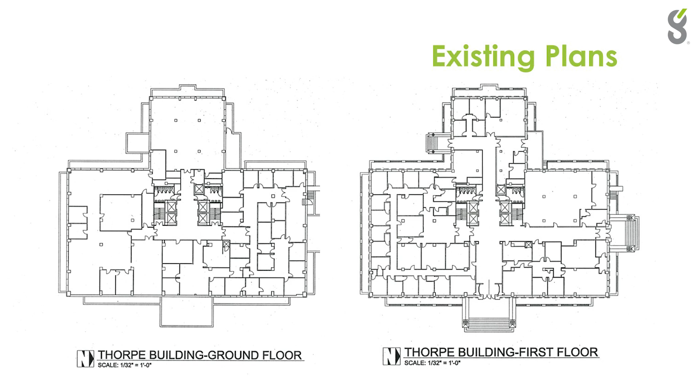We're going to round robin this presentation a little bit, and then we'll get into a little bit of a panel discussion. But thank you very much, Matt. And I just want to go through what we embarked on for this laser scanning component of the project. So this should be fairly familiar to most of us as a starting point for a lot of our renovations. It's basically blank plans, and sometimes it's gathered from the fire routes on the walls, and sometimes we have better drawings, like from what Matt had said.

On this particular project, we didn't have much to go on, and it was very clear in making a walkthrough that we had a lot of work to do because not all of these spaces were fully accurate and well accounted for. We went through a large planning process on this. We ended up doing a hybrid method where we combined a whole bunch of different types of scanning and a whole bunch of different types of reality capture all together in one. And it started with the exterior here.

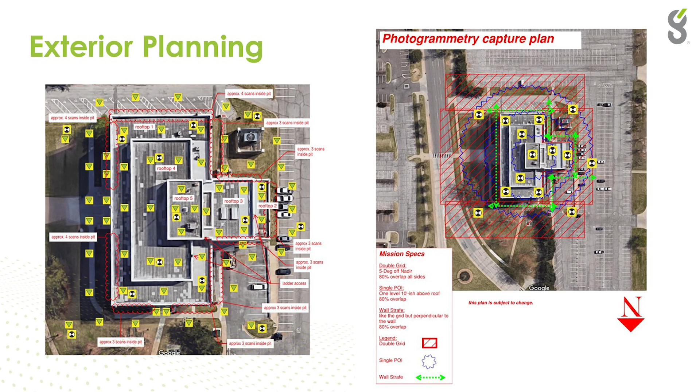And if you take a look at this on the left-hand side photo, we actually have located where we are going to place all of our instrumentation. That was a really big component of trying to make sure that we captured everything that was important to the project. And at this point in time, everything's important to the project because our task is to capture that 90%. And so we tried to go over and above what we could actually capture with just a regular tape measure. We went everywhere. So as you can see, we've got a very full coverage of the exterior using a terrestrial, and then we've also done some photogrammetry on the site.

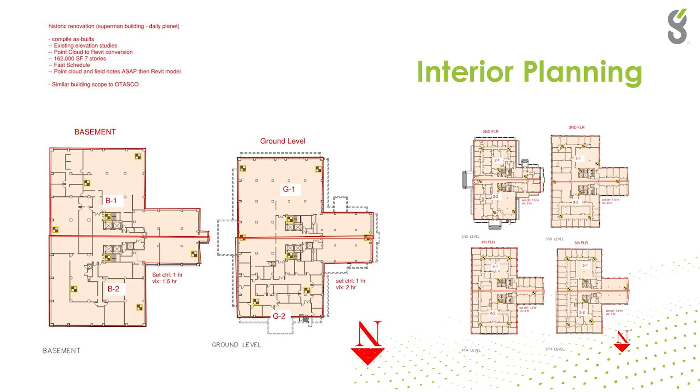On the interior, the schedule was really super important to make sure that we weren't going to disturb people, make sure that the secure spaces could stay secure, and we could really get done with each one of these floors and departments as quickly as possible. So we ended up using mobile mapping for this, and every project, every floor that we did had a mobile mapping scan plan associated with it.

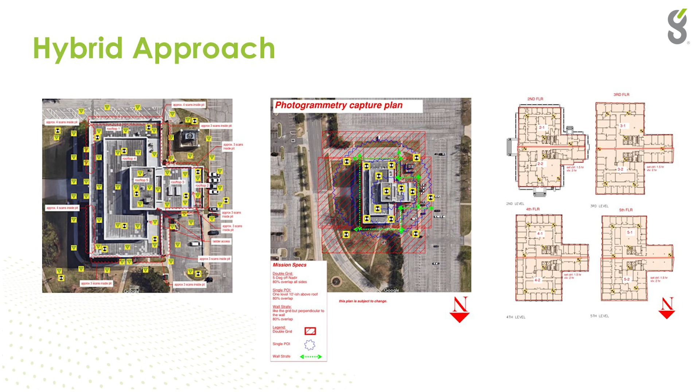So again, like I said, it's a hybrid approach where we took out our terrestrial laser scanner, very high density and high precision equipment, and then layered onto that all of the photogrammetry and mobile mapping.

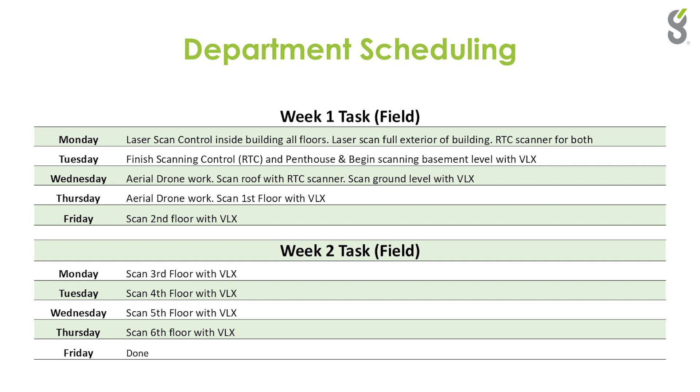Independent of that, we also had to work with, again, this really strict schedule. So we could only be in the building at certain times, and then we had to very specifically map out which departments we were going to measure when. So we always had to have somebody with us while we were doing it. We actually had to shut down a couple of elevators because we were doing elevator pits as well. So we covered the entire building.

The main piece of this is the skeleton. Just like any good skeleton, it's going to hold together the bones. It's going to hold together everything associated with the project. And in this case, our skeleton is actually control points. So we set control points across the building, through the stairs, outside, on the rooftop, so that we could validate and control our laser scans. And I can get into more detail of that if time allows.

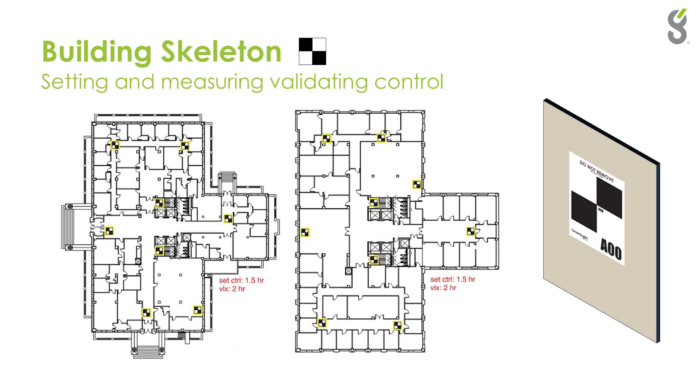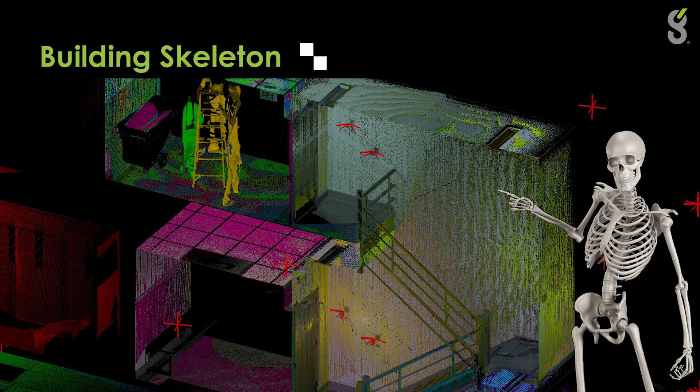But we built the skeleton, and in this, it might be hard to see, but all these little red X's are the control points that we used to control and validate our space. They look a little bit like this, and I'll just point one out here. The validation came from the terrestrial laser scanner, which has very high density and is very highly detailed, very accurate. And you can see that we actually put multiple control points inside of the stairs because that's what was linking together all the floors.

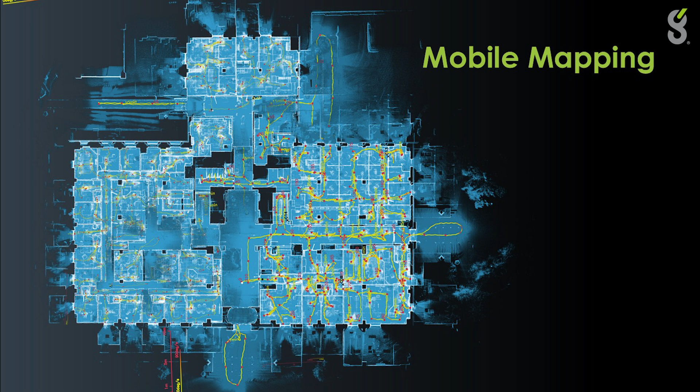If you've never seen mobile mapping data before, it's a very interesting looking data set. It has a number of components to it, the first of which being this yellow line. The yellow line is our trajectory. So different than terrestrial laser scanning where you have one position and move to the next, we actually have a trajectory that we can follow, and it can paint the 3D data as we walk. And then each one of these red dots is a singular photo. And I'll also point out that we do have additionally some control points that we have marked as well.

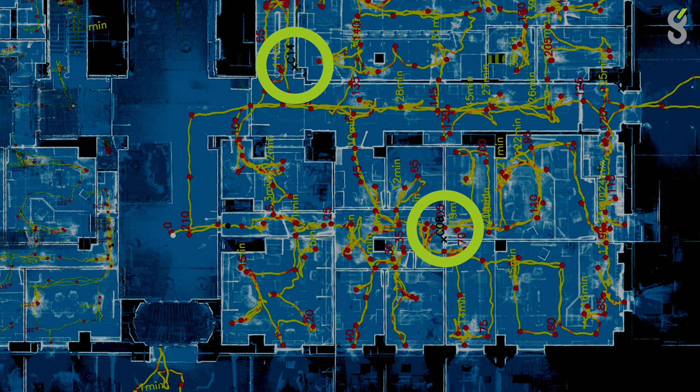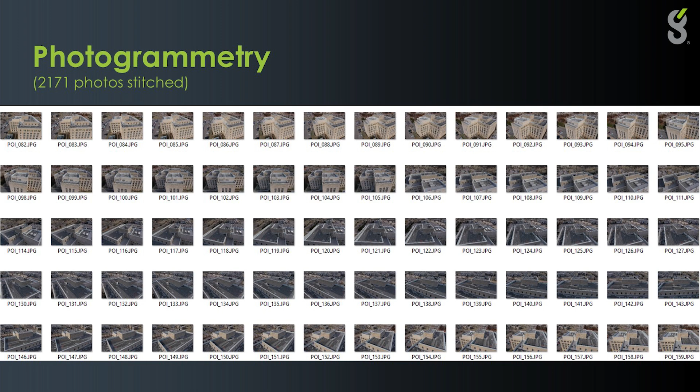So this is the first step in validating the data that we have captured and locating it and constraining it to that skeleton. We also did photogrammetry. We took 2,100 photos of the exterior of the building. It's a lot of photos. But what's nice about it is that we can generate that into a 3D model as well. So all these little white dots are photographs that were taken by our drone and then stitched together into the 3D point cloud that you see below.

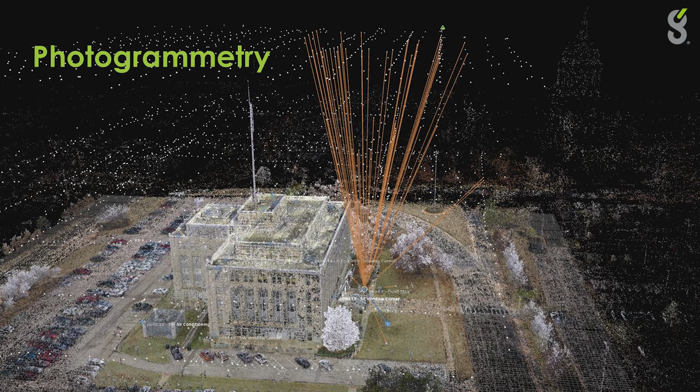All of that is actually conforming, again, to those control points here that we can see from our aerial point of view. And this is what those would look like from up above. The exterior terrestrial was also coordinated with this set of control. We didn't have to do as much control for the exterior, because the exterior terrestrial combined with the interior really set our control for us as we went.

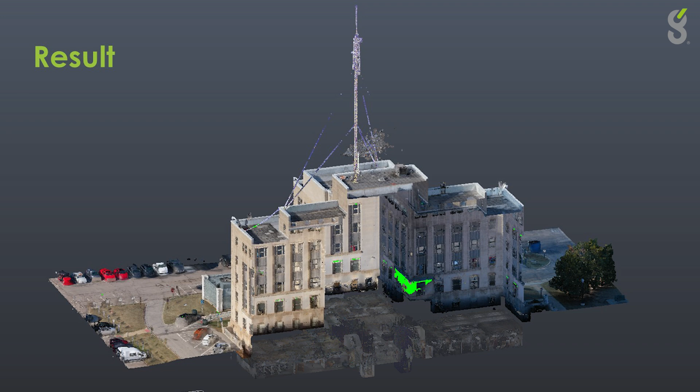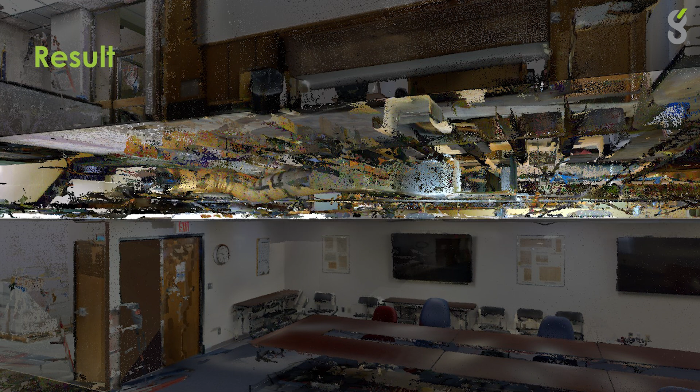At the end of the day, we ended up with a full point cloud. This is a section of that point cloud, but it's a full point cloud of the exterior, and then going up from the basement to the first floor and everything else, it all maps out together. So it's a full and complete point cloud everywhere that we possibly could, including inside of the ceiling. And that was a big component of this because as we know from many of our design projects, we never really know during the RFP process where the project is going to lead. So really capturing, again, the 100% of the building was really important for us this time. And then we took that point cloud and we generated a Revit model.

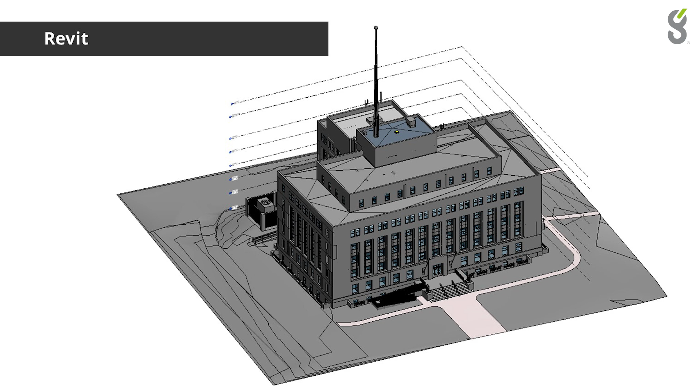So the Revit model turned into a highly accurate Revit model, way more accuracy than what we had from the PDF files. It's a pretty simple process of mapping our point cloud data with our Revit model, and we don't necessarily discard the old PDFs, but we do generate most of our drawings then from the point cloud data itself.

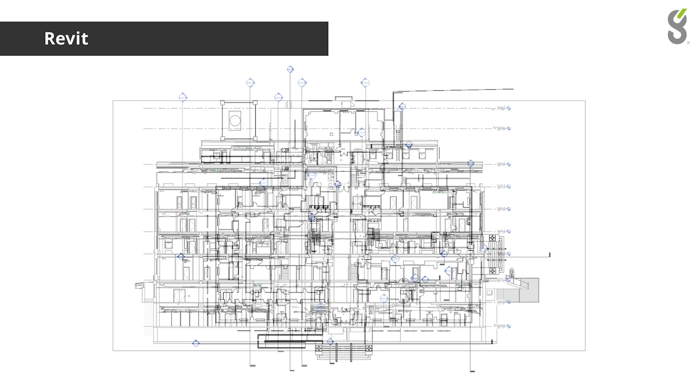And as you can see, we had a lot of information inside of this model. All of the above ceiling information that we could get. Not all ceilings are able to be accessed, but where we could, we added that information.

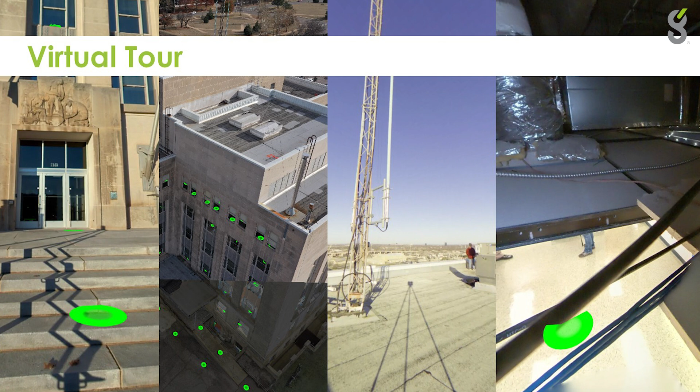The last thing that we did was we created a virtual tour, and this is an example of these 4 components all stashed into a single virtual tour. And we'll talk about that a little bit later and how the design team used it. But we have all of our mobile mapping data, our exterior terrestrial, our drone data, and all of our above ceiling in a single view, in a single file that the team was able to walk through multiple times and sort of avoid having to bother the tenants of the building.

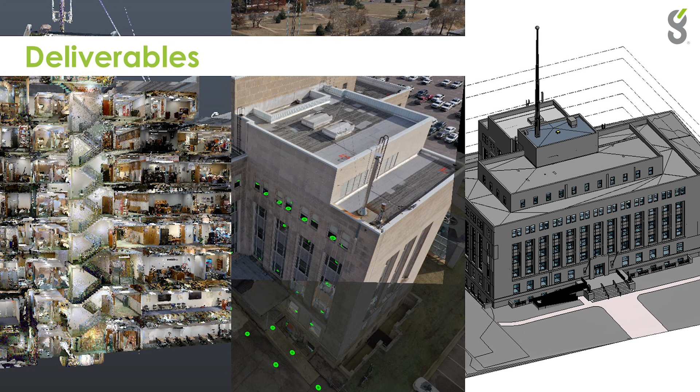So that really wraps up those 3 deliverables. We gave the design team the point cloud itself to be able to do any measurements that they want over and again. We gave them the virtual tour, which allowed for that deep level of visualization, and then we also gave them the Revit model that allowed them to build their designs from. That was the scope that Matt had asked us to work towards. So with that, we just wanted to give you a quick update on where the project stands now, and Jeremy and Heather will do that, and then we'll jump into some questions.

Thanks, Andrew. As you can tell, this information to come into this project during the RFP process and to have access to this is incredible. The RFQ process was incredibly intense. Being that it's a design build project, I'm not sure how many people in the room have worked on design build. There's not a lot of opportunity for that in Oklahoma. If there are 2 things that I love most, though, it is a high amount of collaboration between the architect and the contractor, and then historic projects. So this one just kind of jumped out when it came through.

Obviously, I'm sure many of you thought that we are very much the underdog in approaching a project such as this. We have a history of doing private work. I reached out to 2 architects that definitely would have been well suited to do this project, both of which turned me down and competed against me. So I asked my husband, because I was home at night, like, no one will do this with me, will you? So just so you didn't think that I just randomly want to use him on everything, I just wanted to point that out ahead of time.

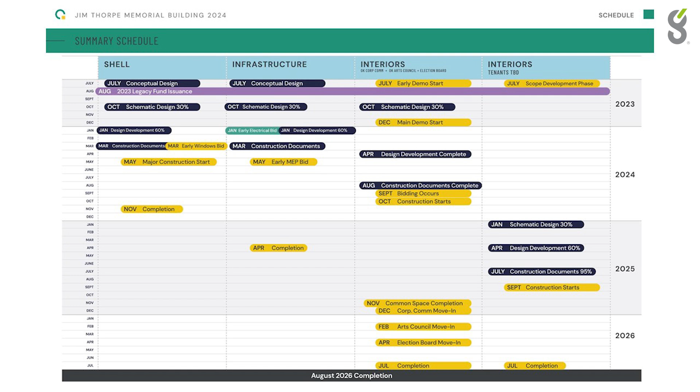So as we approached the schedule for this, it was a 3-year tenure. So we broke it down into kind of 4 different silos of how we approached that schedule with the shell, the infrastructure, the interiors, and not only the interior office, which is non-historic, but also the interiors that are historic. So that's kind of how we broke it down. And you may want to speak to how you guys are wanting to deliver certain things at certain times to help alleviate some of the displacement that's occurred.

Yeah, I think that one of the unique things about this process of how we responded to the proposal was, given how much information that we were able to receive, we were able to think through this with a lot more confidence of how we could, from a scheduling standpoint, be able to deliver not only core and shell, but also some of the key tenants. And so I think that was part of the strategy, and I think we'll get into some of that later as we get further into the presentation.

But that was really key, is again, having all this information let us have a lot more confidence in terms of how we could really drill down into a very specific solution. Yeah, and that was one of the key indicators that we were told was part of our winning the process, was thinking about it in that way and thinking about how do we reduce time, which again reduces cost. We're always thinking with that mindset.

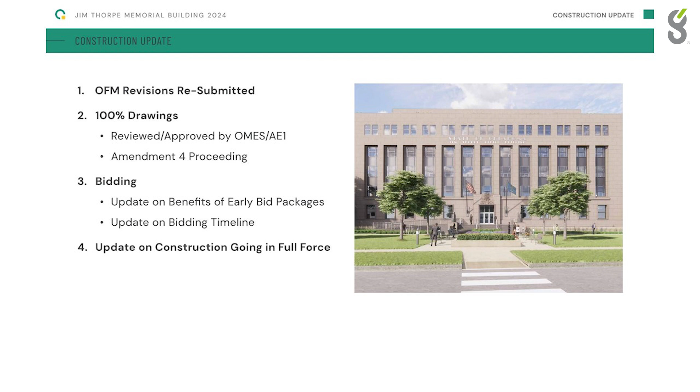So as it relates to the site, these are some updates. We are at 100% drawings right now. We are in the bidding process. It will bid next week. So we are about to roll into full construction, but to date, we were able to do a few early bid packages, such as all the demo is complete. I'll show you some photos of that. We did early electrical really early on, and then we did our core MEP procurement not too long ago, and then we also procured the windows, which was a whole undertaking, and we may or may not get into that, but that's kind of the status.

We did get fire marshal approval. This goes through the state. So we're pretty much rolling into construction, and my portion of this is kind of coming to a conclusion. But this is sort of where it is now interior-wise. Kind of looks a little bit more like the model that he showed you now that we've been able to demo out. So we're in preparation mode and ready to roll.

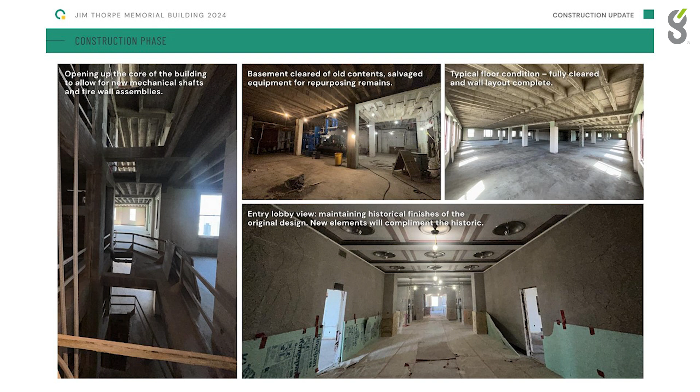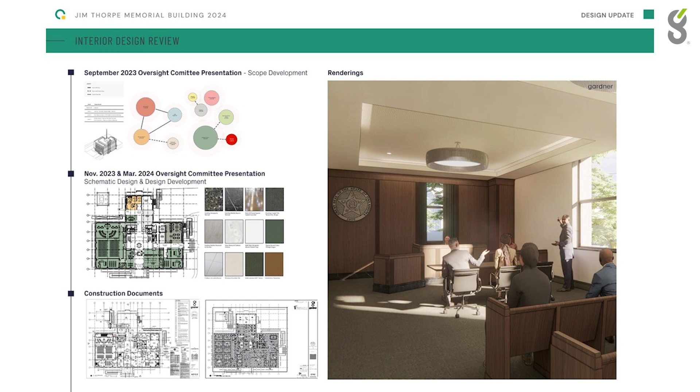So this is an update from the Legislative Oversight Committee meeting that Heather mentioned, but what we've been able to do is build on all the initial information, which is obviously very robust. But again, us being able to speak to some of the historic interiors and some of the requirements that were there from an ownership standpoint, really wanting to maintain an aesthetic that was in line with the original architecture.

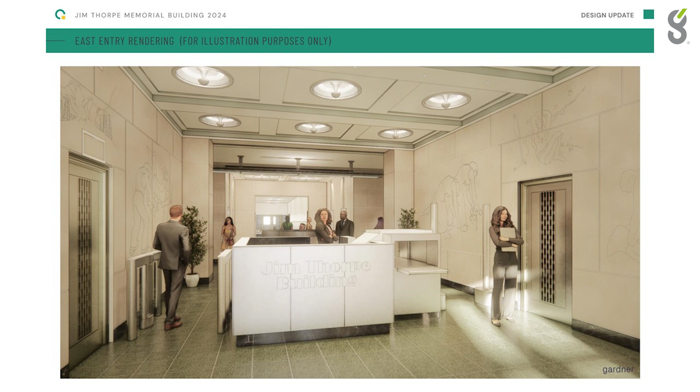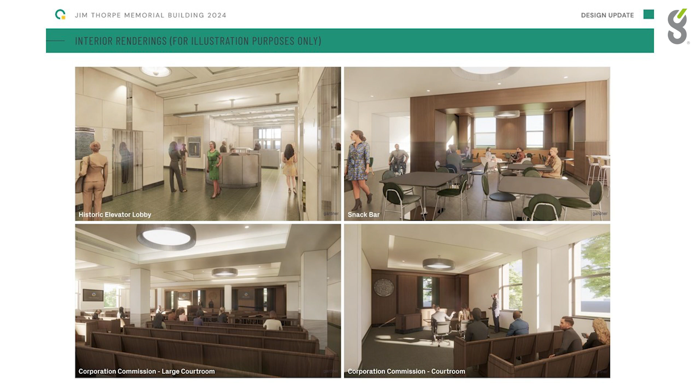And so I think that having the model, we could really start to dial into some of those key architectural components. Especially this image here is the entry lobby, and again, this is a modern renovation, and so being able to figure out how to fold in security, based on some of the key tenants, Corporation Commission, and the amount of people that will be coming in, and there's a series of courtrooms, and being able to preserve the integrity of the key interior spaces. And then just being able to, again, add all these layers of new materials, new finishes that really embellish this great shell and core of a building.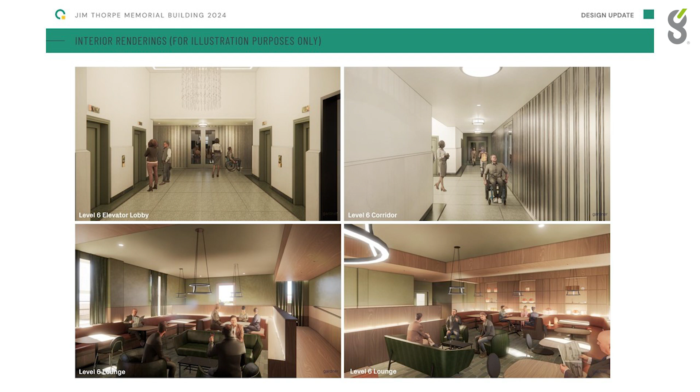So just more images. We can linger there if you want, but I think this image is important because at our first oversight committee meeting, again, they didn't have landscape as part of this. We've been able to alleviate the budget, which we may or may not get into significantly, by really studying the point cloud. How do we find efficiencies in the MEP? How do we find efficiencies with the insulation around the perimeter on an existing building? How do we preserve some of the existing infrastructure that's still in good condition? Those were some studies that we did.

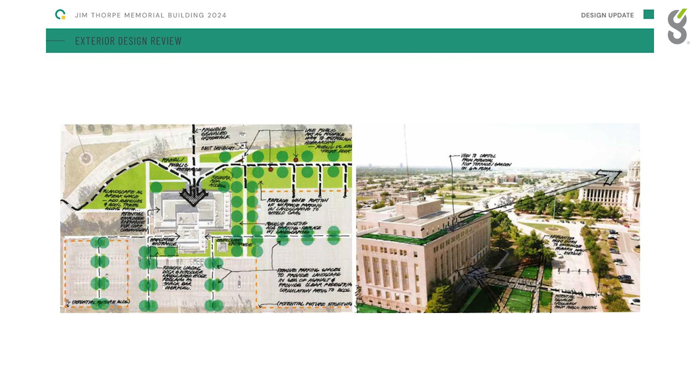We were able to help with the waterproofing issue that was originally slated to be very robust; we were able to minimize that and find other ways to accommodate it. So we're able to really think through the budget to make sure that we're not just thinking about the interior, but also about how it connects to the Capitol. This may seem minimal, but it really does find ways to connect and create that grand entrance. If you've ever been to the building, it's very confusing how you get into the building or where you go. These minor things we're able to help improve upon. So this is a little bit of an update of what you'll see in the next couple of years.

And then this is Jeremy's brainchild. So I think that using all the information that we received allowed us to think a little bit differently about what we thought the solutions would be. We'll get into some of that, but we felt like we had a lot of confidence in the budget that was our target. And we had this inclination that there may be some other opportunities for what the state calls betterments instead of add alternates. And so in our RFP response, we included some of these things that Heather alluded to, like maybe there's some opportunities with additional funds, if we're able to harvest those, to really shore up how this beautiful historic building presents itself to Lincoln, and to create opportunities for a more intuitive public

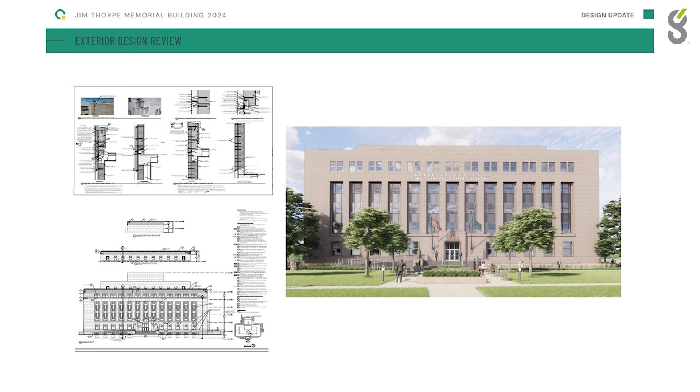So all of those things we thought may be possible based on budget allocations and some of the strategies we had to really tap into MEP efficiencies, so that we could peel some money back towards the end to explore some of these options. Having this point cloud was so advantageous that we didn't spend all of our time drilling down on what is actually inside this building; it was already exposed to us. So we were able to think holistically and have more of a vision of how this actually becomes the iconic building it was originally meant to be. So that's a little bit about where we are, where we came from, and where we're going.

Realistic budgets during the design phase are sometimes hard to come by, specifically due to the number of unknowns. When you see one, it's almost like you found a unicorn. How did having this information up front, and we've already covered some of that, affect the budget, your expectations of the budget, and how you were able to think about the budget and maybe offer a better one? Well, starting from our side of things, some of the initial dollars and budgets set forth within the bond appropriation preceded this level of investigation. That was being built on conversations within the market, looking at what had been accomplished with the State Capitol restoration, and reeling in what some of those expectations were.